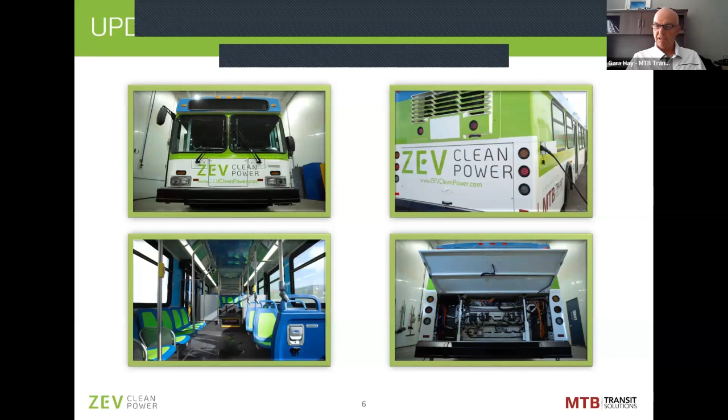And you can see by the pictures, and if you've seen this bus, it looks, it acts, it drives, it feels exactly like a new electric bus. It's very quiet, and the performance is excellent. So one thing, if you repower your bus, you're going to have very similar performance and very similar outcomes that you would have in comparison to a brand new electric bus.

I have a quick video here. This will give you a good overview of the program. It's about a minute video.

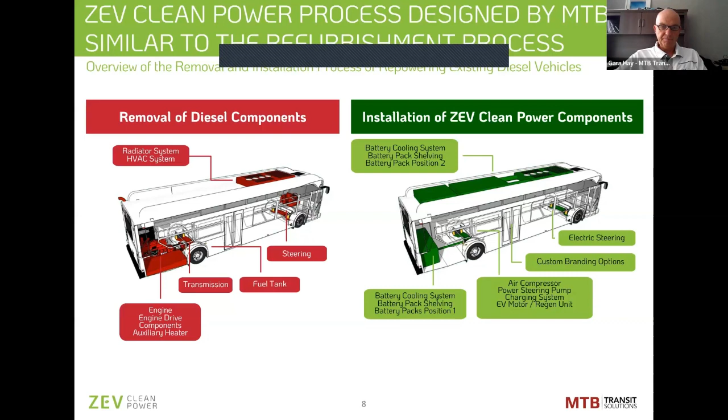I don't want to get very specific on the technical aspects. Again, we have a much more detailed presentation, but we get a lot of questions about the motor system and the battery. So our batteries that we're using are lithium ion. The range we have on the bus currently is around 220 to 290 kilometers. Of course, that will vary depending on driver ability. It'll vary on weather, it'll vary on topography of your routes.

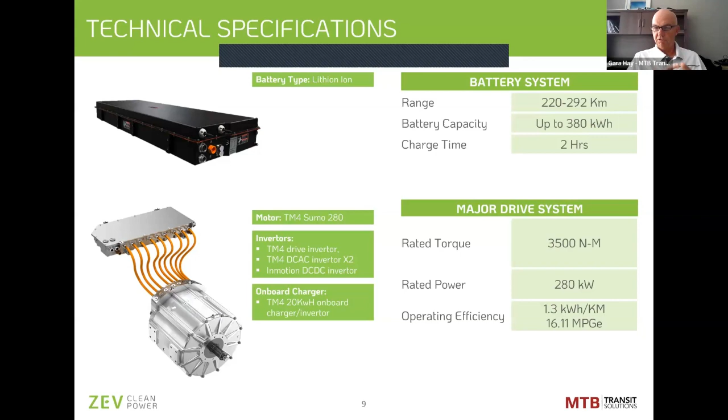The current bus option that we have has 380 kilowatt hours of batteries. We expect our next version to be at over 400 kilowatt hours with battery performance improving. These are 0.5 C rated batteries, so they could charge in 2 hours, depending on the charging infrastructure you have. The motor is a TM4 Sumo 280. It's the very similar motor that's used in many transit buses and heavy truck units around North America. It's a very solid machinery from TM4. We also use all their inverters.

It's a great motor. On the charging compatibility, and that's another question we're asked a lot, you don't need a specific unique charger for our system. It's compatible, it's CCS1 type 1 compatible, it's J1772. So if you already have a Siemens or an ABB or maybe a ChargePoint charger in your infrastructure, this will work, this will be compatible. It's fast charge compatible, as I said earlier, it's rated at 0.5 C. So let's say you had a 190 kilowatt charger, you could charge this bus in 2 hours. Most operating maybe with a 50 or 100 kilowatt charger, you'll get it charged in say 4 to 6 hours.

It's got a thermal system, so it preheats the batteries, especially in cold environments, and it's pretty unique. It's got a little 20 kilowatt AC charger on board to charge some of the low power functionality, but also if you ever get stranded and you need to just do a quick plug-in to maybe get back to base, it's equipped with that.

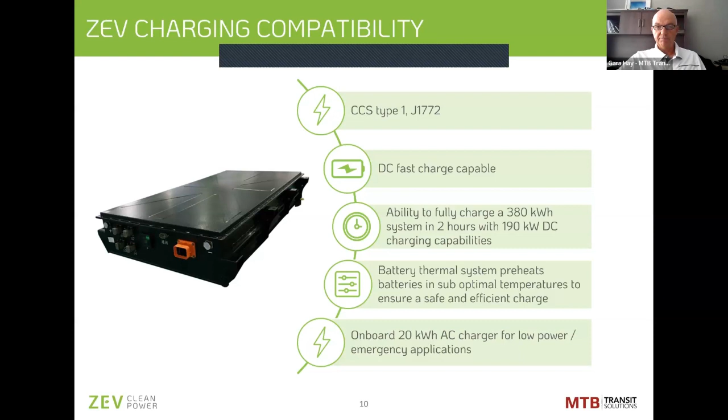We're not an engineering company, so we work with one of the top engineering companies in Canada called IVI. They are based north of Montreal in Saint-Jérôme. They've done all the engineering for this project and for the Milton project. You may have known they cut their teeth with Lion Electric on some of their first school buses, and then with Nova Bus on their first conversion, their first diesel to electric program. So a very knowledgeable crew, they do excellent work, and we've been partnering with them since the start of this project.

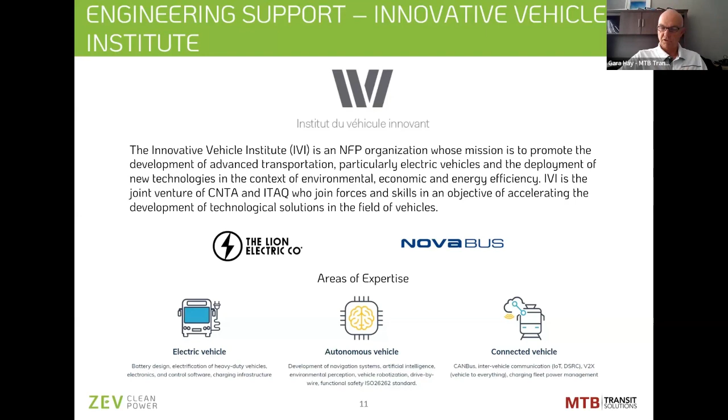On financing and funding, when we do a presentation, we show a very strong ROI on this project. The cost to do the repowering is more than covered by your savings on maintenance and fuel. But on top of that, there's some really good financing and funding options available.

Through ZETF funding from Infrastructure Canada, repowering is an option. So if you get ZETF funding, you can use it to buy new buses, to work on your facility, or also for repowering. The wording is actually in the document.

Same with the CIB. If you're financing through the Canada Infrastructure Bank, you can use those dollars for repowering. And with many municipalities working through the FCM, the Municipality Association, there's a Green Municipal Fund that can provide funding for pilot projects such as this. If you're a smaller municipality, you can get up to 80% coverage.

Most of these are stackable when you're looking at the economics of our program. So repowering is available for all of these programs.

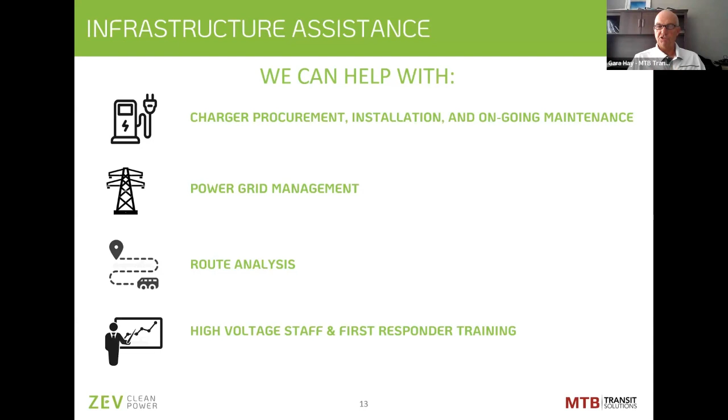If you're a smaller transit operator and may not have the infrastructure or personnel on your team, we can help. We can help with charger procurement, installation, and ongoing maintenance. We can work with our partners on power grid management and route analysis, and we can train your staff and first responders. So if you feel you haven't been making a lot of headway and need support to get over the finish line, we can help you get there.

My last slide on our program covers some of the benefits of repowering. The way we look at this model is: if you're a medium or large transit operator well established on your decarbonization plan, we think this will complement your program.

As you're buying new electric or hydrogen buses to replace your older diesel buses, you'll continue to do that, obviously. What we can do is come in and clean up some of the older buses that are structurally still very sound and still have a lot of life in them. We can repower those buses while you're doing procurement on the front end, and this will help you get your GHG reduction goals sooner.

Maybe if you're a smaller agency and haven't taken that first step yet, we can help you. This could be your first bus to introduce into your fleet, and Tony will talk in a minute about how Milton looked at this program to help them get there.

This is a quick turnaround. We know procurement is strained right now on getting deliveries. We can complete a conversion in 6 months.

One of the great things is we maintain the gross vehicle weight and the curb weight of your vehicle. So there's no change to seating, no change to layout, and no change to rider capacity. We feel this is good for the supply chain, and there are a lot of benefits.

You're going to give us, say, a Nova or New Flyer bus, and we're going to give you that same bus back. So for parts, your maintenance team is already used to working on these buses. For your drivers especially, they'll get the bus back and it's going to feel and look the exact same as always. The controls and functionality of the bus are exactly the same, just cleaner and quieter.

So my name is Tony D'Alessandro. I'm the Director of Transit Services for the town of Milton.

During my portion of this presentation, I'll first provide a brief background of the town of Milton and a little bit of Milton Transit. I will then outline our decarbonization strategy and how this repower conversion with MTB Transit Solutions came to be.

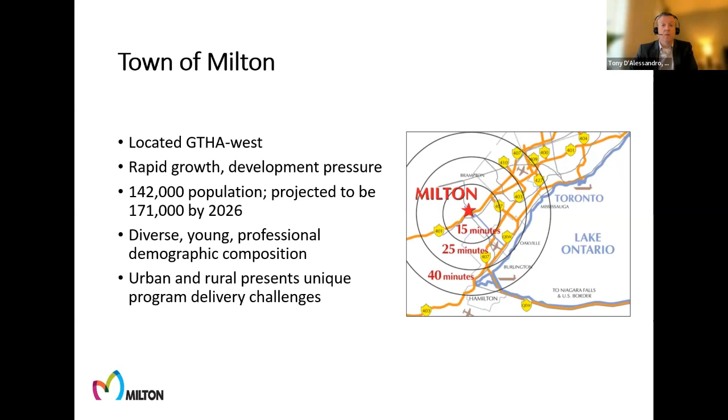So very quickly, Milton is located in the western part of the GTA. We're facing rapid growth and development pressure with a current population of over 142,000, projected to be well over 170,000 by 2026. Our resident composition is quite diverse and young. Milton is comprised of a large urban and rural environment, which brings about some unique program delivery challenges.

While Milton Transit provided limited transit services in the 1990s and early 2000s, it wasn't really until 2004 when we launched our fixed route service. All transit services are contracted, and we use a third-party service provider and a contractor lease facility to house our 37 town-owned transit fleet of mixed sizes. Our system is a maturing system.

We're seeing a higher local trip demand compared to long-distance commuters, which is a new and exciting thing for us, and this has primarily been driven by our youth and employment market. We use a family of services delivery approach, which allows us to align different fleet types with alternative service delivery models. And of course, we manage the entire system with a very small but effective administration comprised of 3 FTEs.

So really our approach to sustainability included corporate and community engaged energy plans, and a council declaration of a climate emergency in 2019. More recently, council approved our corporate strategic plan through 2027, which definitely includes a number of transit initiatives, such as building our very own town-owned transit garage facility, completing a 5-year service plan and master plan update. And then the 2 key pieces related to sustainability and decarbonization: the development of a battery electric bus feasibility study, and our diesel to electric midlife conversion pilot project.

So my last slide is really in order to achieve council buy-in. We put together a preliminary business case for piloting this technology. We assume that the initial capital investment had the potential to reach a break-even point at year 12 when comparing to diesel life cycle costs, assuming varying diesel pricing. However, with any pilot, further life cycle evaluation will be completed with actuals upon vehicle implementation, which we anticipate in 2024, including fuel and maintenance savings. With that, I'll pass it back to Gara to provide further details of the project and timeline.

Great stuff, Tony, thank you so much. Now I'll bring you an update. We started this program earlier this year, and I'm going to give you a step-by-step update on where we stand today.

One of the features we provide to Tony and anybody taking the Repower program is regular updates. We provide a monthly update to the customer showing exactly where we stand on the project. Tony and the town of Milton have done a terrific job, also putting together a video library of this step-by-step project to get to the final bus product, which is placed on their website if you'd like to see it.

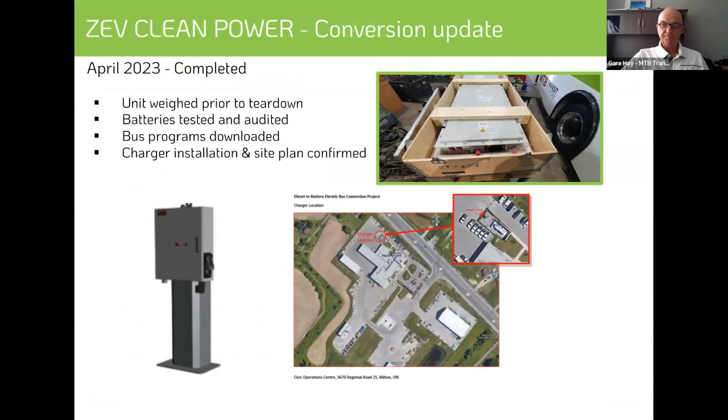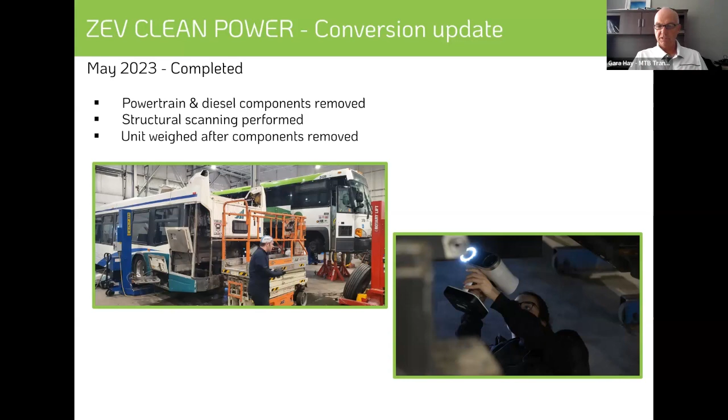Then into May, we started working on the diesel bus. We removed the powertrain and diesel components, brought in a company to do 3D scanning of the bus to make sure we had all the proper measurements. Now we could weigh that bus because the diesel components had been removed, and we're ready to start installing the electric components.

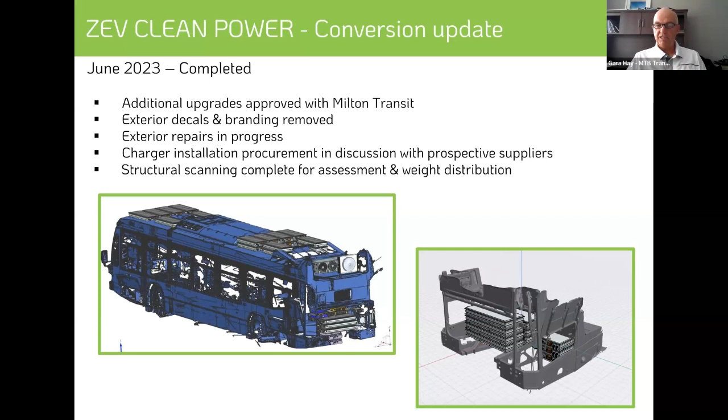By the time we got to June, we started working on the upgrades. The bus needed a midlife overhaul at the same time, so we started working with Milton on those upgrades. We stripped the bus of decals and branding, started repairing some of the external repairs needed. Our charger installation procurement started, and we put out an RFP for the proper charger install. Then IVI started working on the structural scanning of the bus, a proper assessment and weight distribution. So in this part, you can see MTB starting to work on the bus, IVI working on the engineering, and us working on the charger installation all at the same time to get the project moving as quickly as possible.

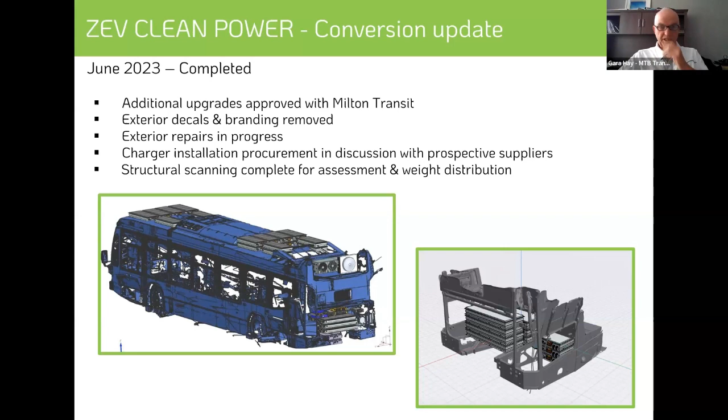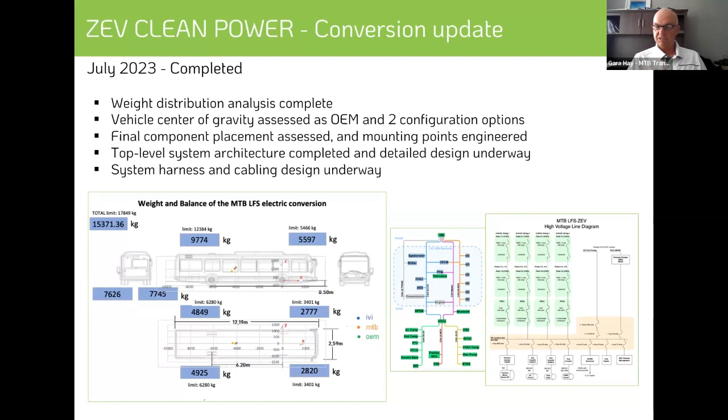By the time we got to July, IVI had now conducted the very important weight distribution analysis, now complete. They determined the center of gravity of the bus. Final component placement is being assessed and mounting points are being engineered. The top level system architecture is completed and the system harness and cabling design is underway, so a lot of engineering work really started kicking in in July. Also in July, while that was going on in Saint-Jérôme, back in Milton we started working on the exterior bus repairs and removed all the interior and exterior components.

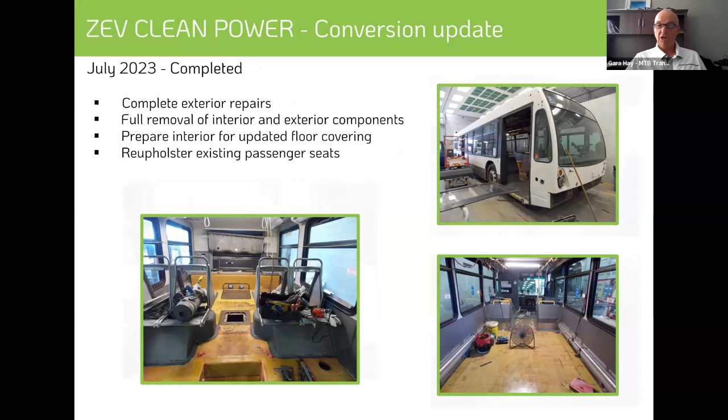Now come to August, we started to work on that former diesel bus. We installed the electric air compressor, the electric power steering pump, and the auxiliary heater has been installed. At the same time, we've finalized our charger and infrastructure for the charger, and we're getting ready to start putting the plan together to install the charger at the Milton yard.

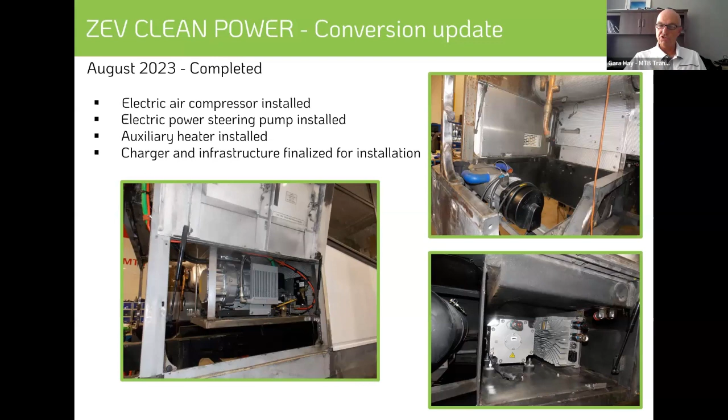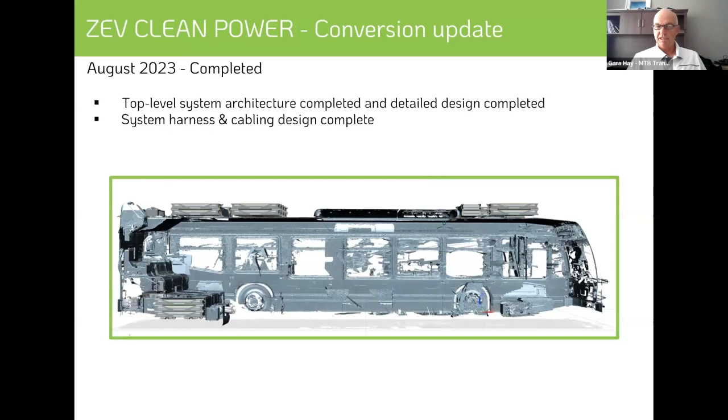Also in August, IVI has been working on the system architecture, which is completed, and the design is starting to get completed. The system harnessing and cable design is now completed.

Moving on to September, October, so now in our current months, we're ready to start placing the batteries and the battery management system on the roof. You can see some of the designs there. These designs will be transferred from IVI to our technician team here in Milton for proper placement of the batteries and the BMS. At the same time, the engine compartment is going to hold batteries and a BMS system, and the motor drive placement of the drive motor in the engine compartment.

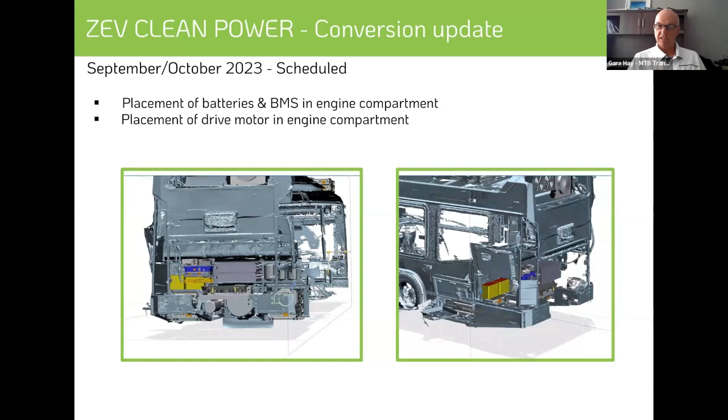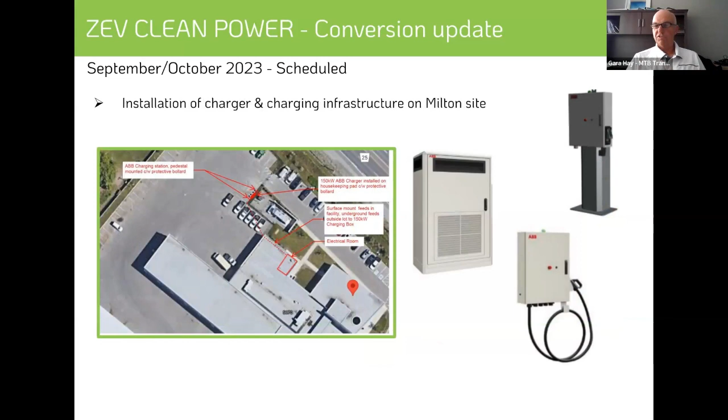The motor is in stock. We just need the engineering company to give us that exact placement for that motor. That's all happening as we speak. At the same time, we're placing the battery thermal system on the roof, on the rear deck, being done right now. And then our charger, Power On has already started digging into the facility to have the installation of the charger and the charger infrastructure at the Milton site. So all groups are moving at the same time.

One thing we've seen has been a really great media pickup of this project right around the world. Many of you may have seen the CUTRIC Forum magazine that comes out every quarter, and this project was the lead story in the summer edition, including quite an extensive article with quotes from myself and from Tony.

Forsee Power, who is the battery provider, put out a press release that was picked up around the world on our program. Again, a lot of local media, the local FM station in Milton, and possibly many of you get the Mass Transit email blog every day that comes in. Back in April, this was actually the lead story at Mass Transit on the program we're doing.

So if you're a transit operator, maybe think about, if you do a program with us, there will be a good media pickup, because this is quite a unique story, and it's a story that local media like to grab.

My last bit is I'd like to show you a video. This was a newscast by CHCH News, and if anybody's not from the Ontario area, CHCH is a Hamilton-based channel broadcast across Canada, and they sent a reporter to do a story on this. The unique part is the reporter who came, this was her first day on the job, her first story she's ever reported. I asked her how long she'd been a reporter, and she told me 3 hours when I met her. But she did a great job, and a lot of people told us they saw this. So we'll watch this video, and then we can get into some Q&A.

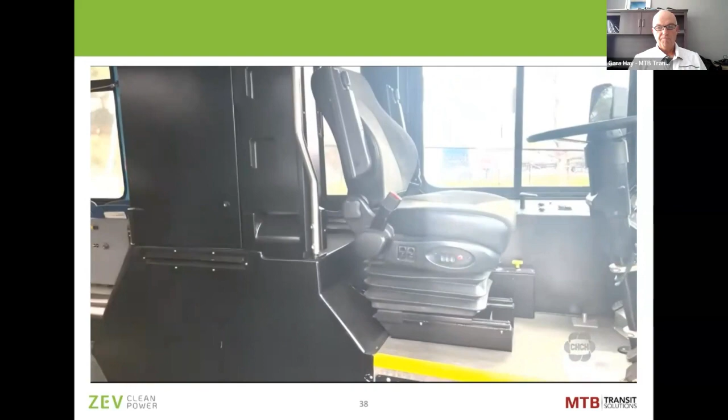Bus riders will soon be greeted by an electric bus on the streets of Milton. The town is working with local company MTB Transit Solutions to convert an old diesel bus to an electric one. Going to be able to tell us a lot about how we could expand our services. Tony D'Alessandro from Transit Services says the town is pioneering this move, and the conversion process itself is a first in Canada, and will help Milton decide if this change should be spread to the entire bus fleet. Really going to give us a lot of information about metrics, how much diesel we're saving, how many greenhouse gas emissions reductions we're going to be seeing.

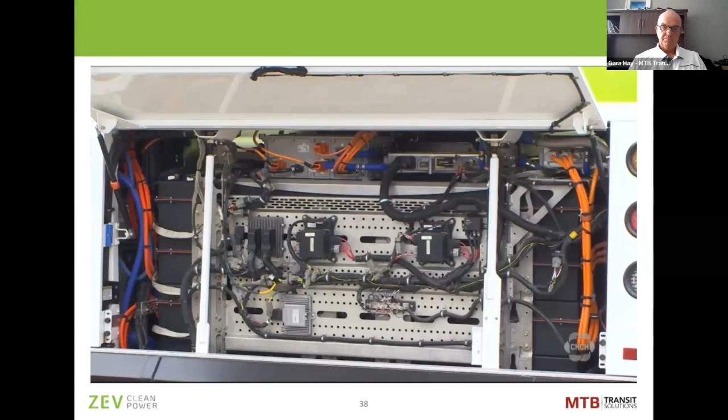What is the maintenance cost going to look like? D'Alessandro says it will move the city closer to its environmental sustainability goals. Statistics Canada says a quarter of Canada's greenhouse gas emissions come from vehicles like diesel buses. Milton says switching a bus from diesel to electric could cut more than 51,000 kilograms of emissions over 6 years.

We are making steps towards improving sustainability in the town of Milton, and this is one project that will do that. So we take out the diesel engine, we take out the transmission, we take out the radiator, and replace it with a much smaller electric motor and put batteries placed around the bus.

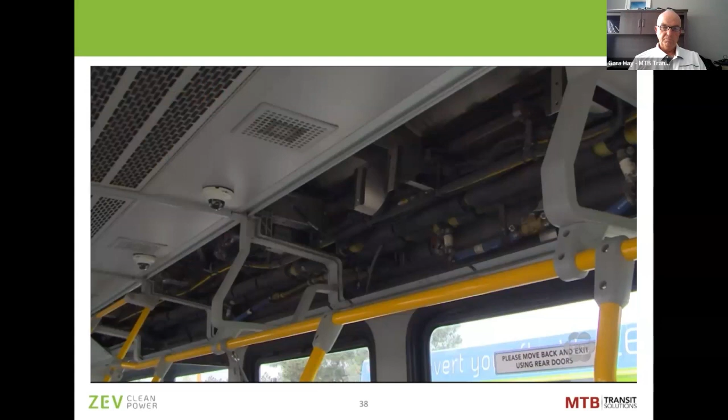MTB Transit President Gara Hay says the conversion will take about half a year, and all the resources used are Canadian. When it comes to the rider experience, the electric bus is said to be a much more comfortable ride, with less noise and less vibration.

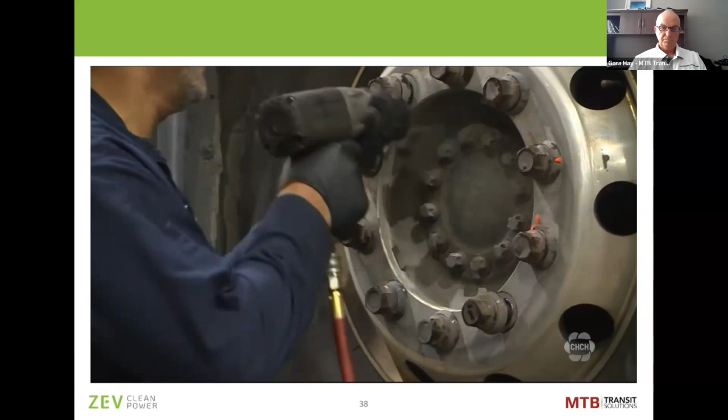The city expects the total process of the project to cost about $900,000, which factors in charging units, vehicle components, and training. But we think there's a good market potential to convert other forms of transportation, like a school bus, a mining vehicle, maybe a garbage truck in the future.

The switch will be done by the end of the year, and the bus is expected to hit the road in early 2024. Simone Gavros, CHCH News, Milton.